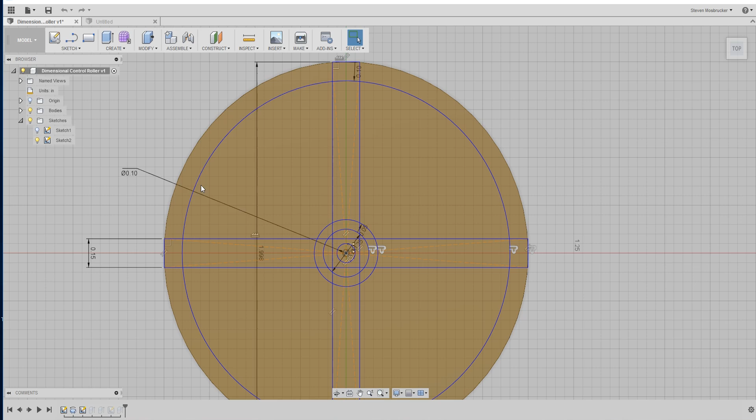So last time that we worked on this, we did the roller of the dimensional control, and this one might be a little different. Reason being is I accidentally, last time we did it, turned off my computer and I lost all the data, so I just redid this really quick.

So it could be a little different, but at the end we'll end up with the same thing after I print it and fix it up. One thing you might note is that I did extrude that cylinder all the way down, because on a 3D printer you don't want any overhangs. So here everything should be just fine.

Alright, so what we're going to do today is design the brackets that hold up this particular part here, and then at the top it's going to have little holes for the pressure sensors, for the FSRs, the force sensing resistors.

So what we're going to do is, what I know is that this hole that I have right here is for a shaft that's 0.1 inch, and also another thing on this is we're going to be doing it in inches, and then all you have to do at the end is turn it into millimeters, and everything's fine. Okay, so they are going to be square.

They're going to be square brackets. They're going to be 2 on each side, and remember that this is only one of the 2 spools. So there's going to be 2 spools that have to ride on this one bracket, and one spool has to be stationary and constrained so it just rotates and does not move in X, Y, and Z, and this one moves just in Z, I guess you could say, but also rotates.

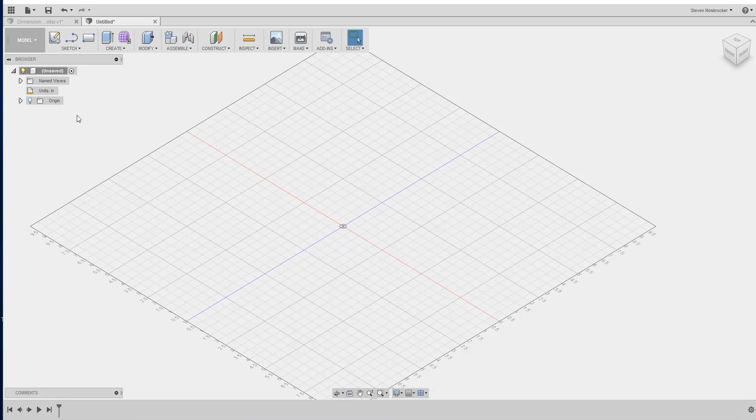So what we're going to do is, like I said, we're working in inches. I got another file open here, and we're just going to start doing a sketch on the flat plane here. And what we're going to do is have this, again, attach to a piece of square steel tube steel.

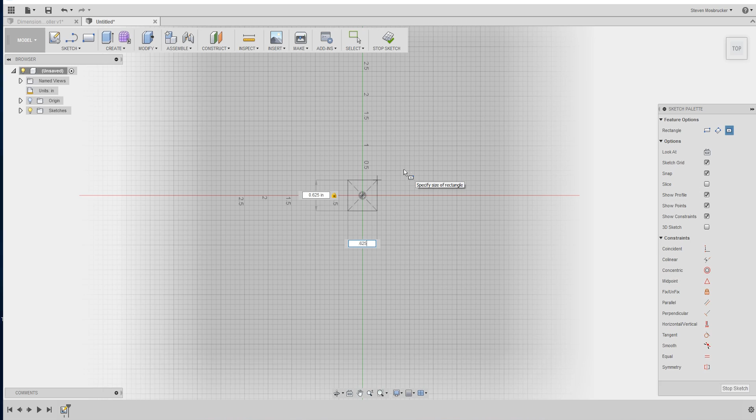And the square tube steel is 5/8 by 5/8. So that's 0.625 inch by 0.625 inch. Is it 5? Yeah, so 5/8 and 3/4 is what I got. Okay, so this is the steel piece, and then of course we're gonna add 0.63 or whatever.

It's gonna have a little bit over so that it slides on there correctly. And then we're also going to put a little hole in the back for a set screw, so that you could put a set screw in there to keep it from falling, because there's going to be a lot of weight on here, and it's going to be cantilevered out, so it shouldn't be that big of a deal.

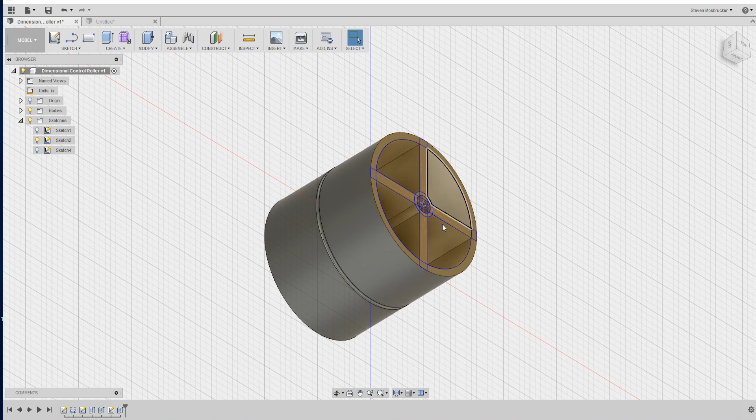Okay, so we have that guy, and then what we're going to do is we're going to have the brackets come out. And another thing is that this guy is going to be, depending... what did I do? I think this one I just made 2 inch. So we'll just have it be 2 inch for right now.

Like I said, we're just doing it roughly. 2 inch seems fine for me. So let's go ahead and do that. So what we're gonna do is we're just gonna draw first off. What I'm going to do is I'm just going to draw a 45-degree line. So 45 is equal, I'm just going to draw out to the side.

This is going to be the gap piece. This is just going to be 1 inch, so it's 2 inch diameter. So from the middle here, it's going to be 1 inch. Put that over there somewhere. And from here, it's going to be 1 inch.

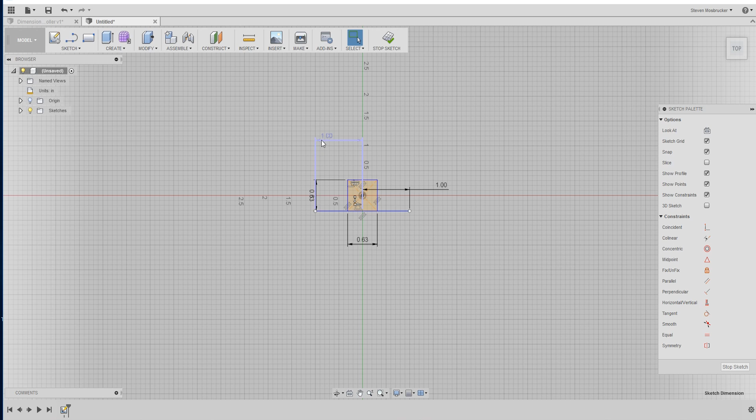And then, of course, you could constrain them to be equal. This one's equal to that one. It's overly constrained because it already says 1 inch. But you could delete that, make this one equal that one.

Alright, so 1 inch, 1 inch, and then what we're going to do is for right now just have a diagonal here. Go out to that line.

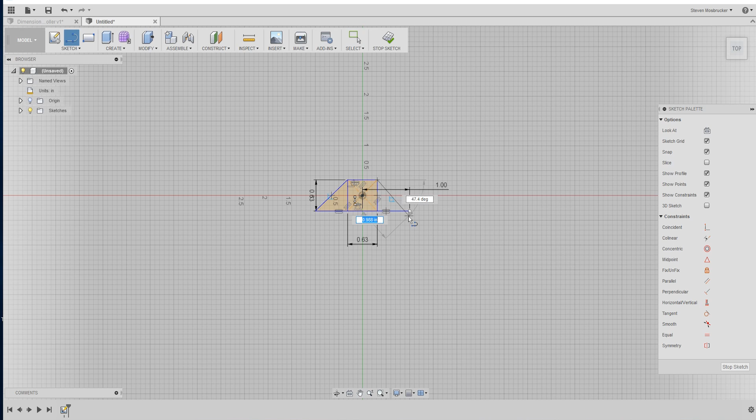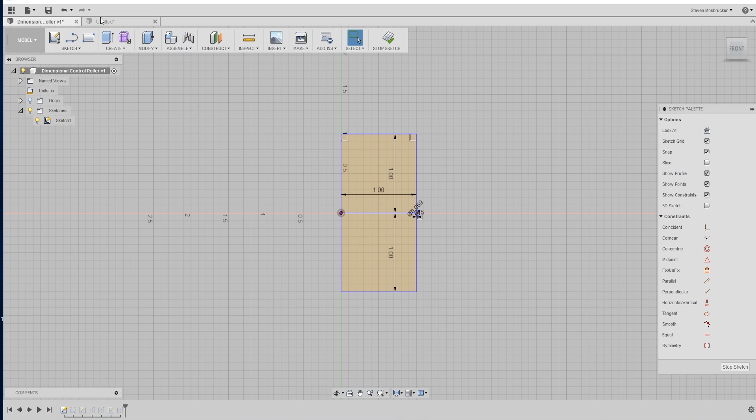And then that part right there is 2 inch, so this is going to be the sidewall here. So then we have it, each cylinder is... where did I have it set? I had it set to, let's go ahead and edit the sketch. So it's 2 inch diameter, which is what I want. So that means it's going to be 4 inches total plus the filament in between, plus 2 mil, which is pretty much nothing. So we're going to make it 4.1 inch. So down this way, 4.1 inch.

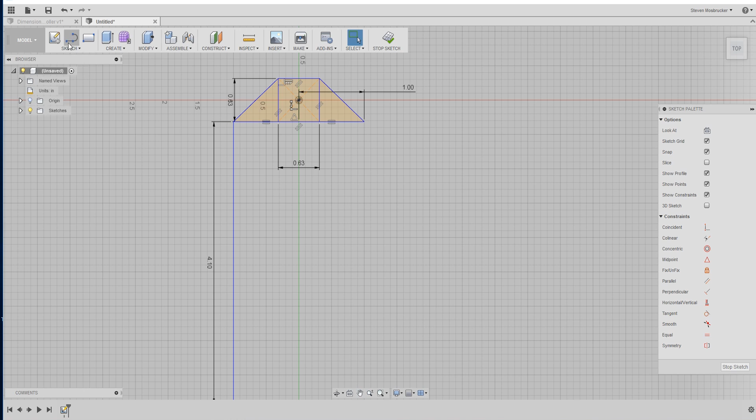Right. It's going to be 4.1 inch. And then what I'm going to do is just delete that and make these two equal. This one. Okay.

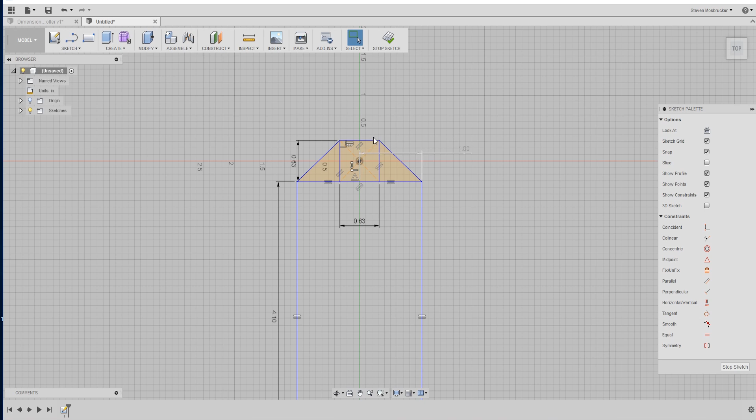So now what we're going to do is square this up for right now. Not going to go for anything super crazy as far as the design here. And then we'll probably put some gussets in here or something. Okay, so let's just go straight across here, and then this should be...

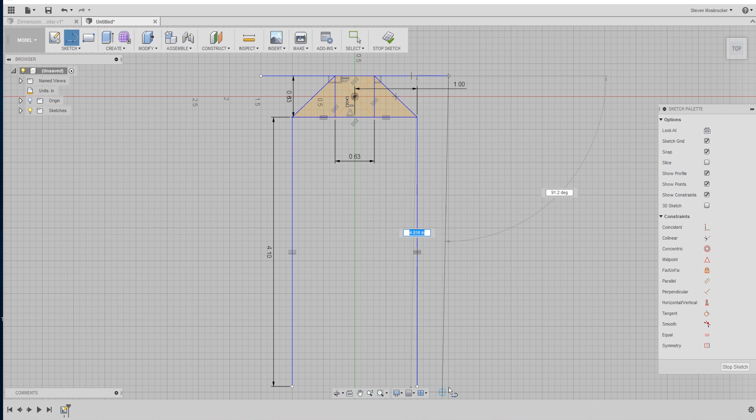I think, what increments are these? This is half an inch increment. Okay, oops. Sorry about that. Okay, so there you go, half an inch increment. There's another half an inch increment.

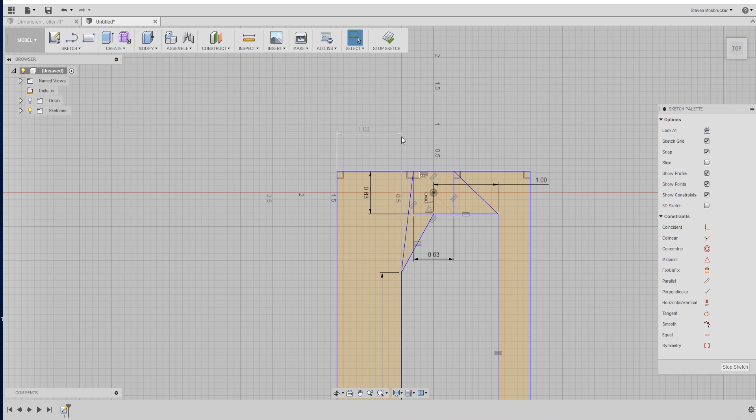You're probably gonna definitely need to be thicker than that in order to hold. It's not a lot of weight, but you don't want anybody to hit it and have it fall over or anything like that. So yeah, it's constrained over here. This piece is constrained, or something. These aren't even straight.

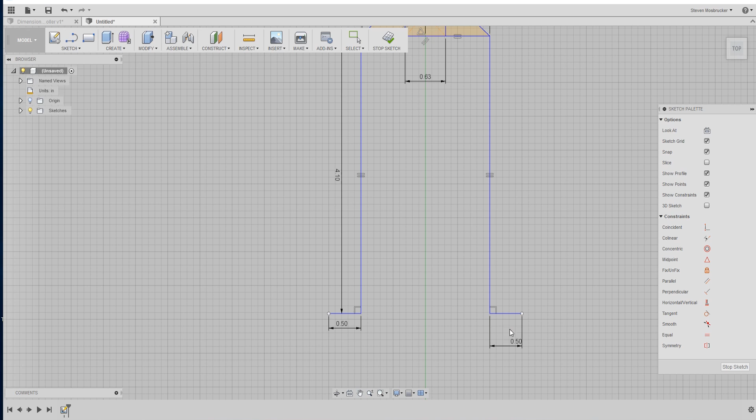Okay, so what we're going to do is just do a line. And we're going to dimension this here. And we're going to delete this one. This one's not even straight. Dimension this guy. And then these two are going to be equal. Okay.

Let's draw a line down. Okay. Alright, there you go. Now it works correctly.

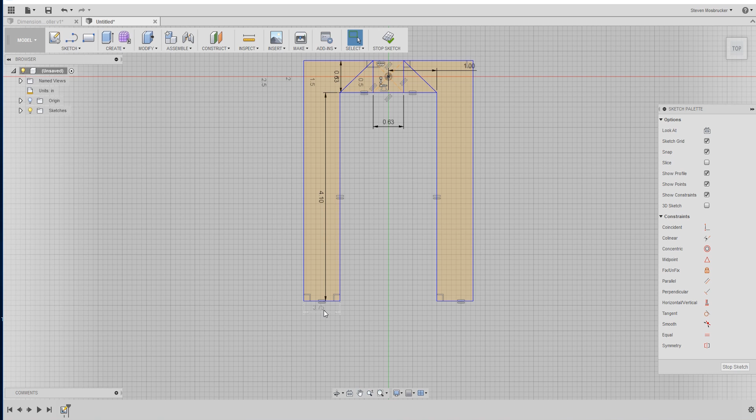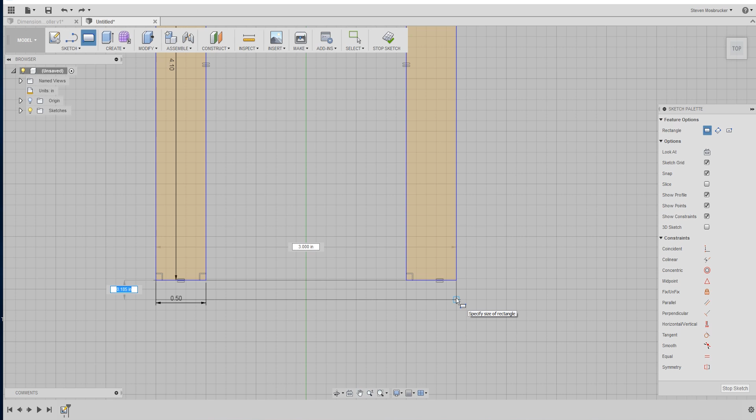Alright, so now that we have that done, what we're going to do is, another thing that we're going to do is I'm going to square this up. So I'm going to basically put a rectangle there. Let's do 2 point to cross it. So let's make this 1/4 inch. So there we go.

Now it's going to have some rigidity here because it's closed there. So these two are going to have some rigidity. Alright, then what we're going to do is extrude this. Extrude everything except for that centerpiece, and I'm gonna have to have something over here on the back, so there's gonna be a piece over here in the back. I'm sure we should probably do right now. And then over here in the front too.

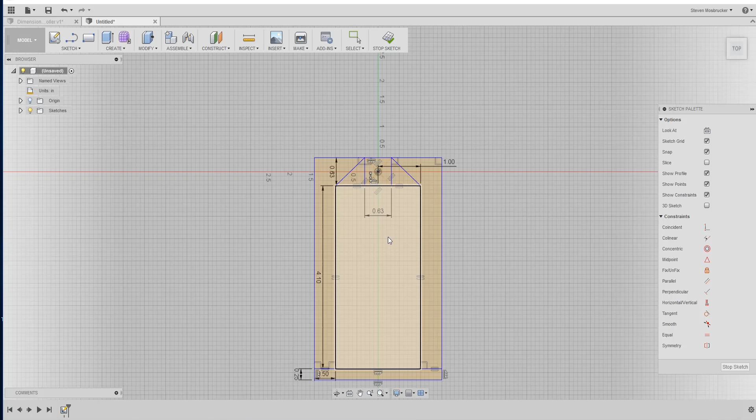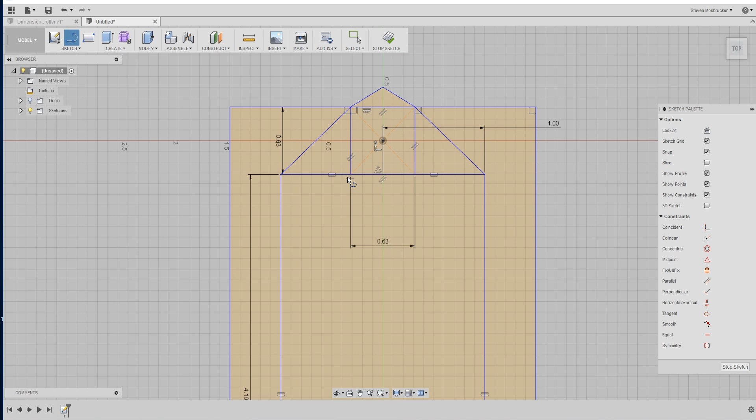Oh, no. Let's just do that for right now. It's definitely not enough to get it to become rigid, but for right now, that's what we're going to do. Okay.

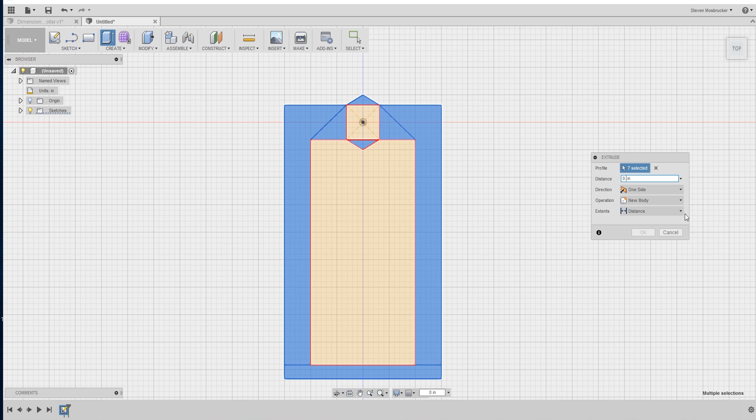Alright, and because, like I said, we're 3D printing this, we need to get it to a size that could be printed pretty efficiently. So 1/2 inch is pretty big. So we're gonna go for that because we need the rigidity. Alright, so there we go.

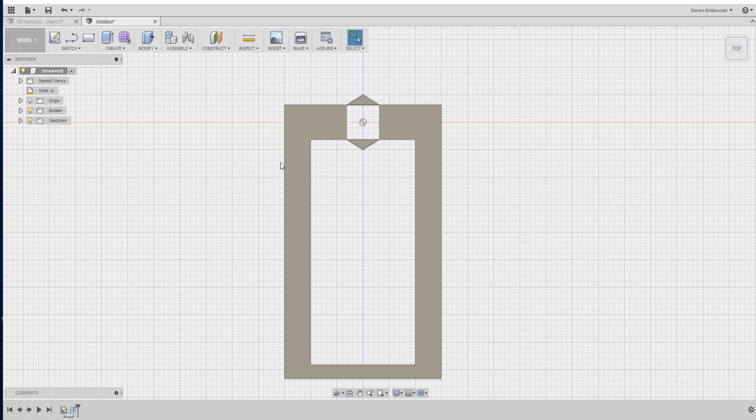There's our shape. Here's a little reinforcement. Obviously not gonna work, not gonna work very well. We're going to need to reinforce this area here, and most likely do a lot of reinforcement in the back and then a little bit in the front. Let's probably make another square. So let's do that right now. Then what we'll do is we'll just make that guy longer.

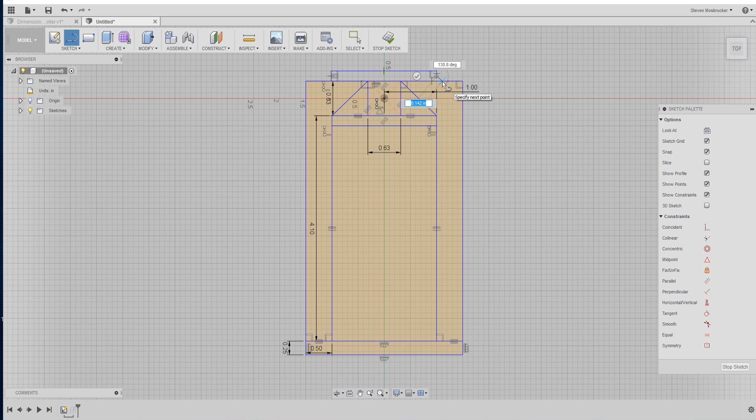Oops. Alright, so it just automatically added that. And another thing is I noticed that it extruded this piece. Don't want to extrude that piece.

Okay, so now we have that, and now what we're going to do is start drilling holes on the side where each one's going to go. And so now if you think about it, this is vertical, this center piece is like, this is the XY plane, and the Z plane's up and down. And the pipe goes through the center, so this is cantilevering out forward. So the filament is going to go down through this section here somewhere.

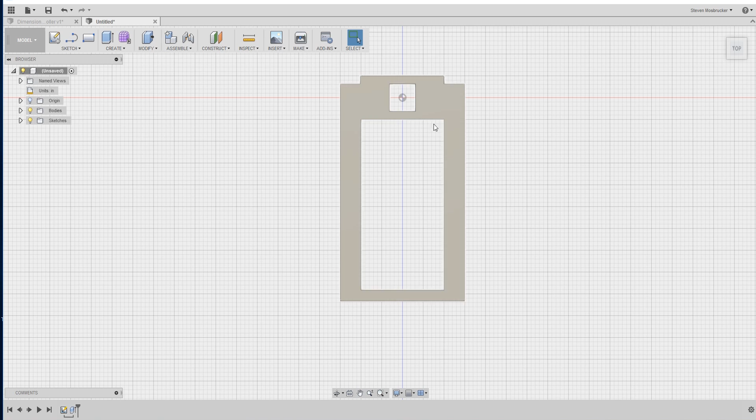So this piece here, one roller is going to be mounted here in this place, and it's just going to spin. The other roller is going to move up and down, so this will be slotted here.

So what we're going to do is go on the right side. We're going to create a sketch on the face, and then we want to project or include this particular line here, this particular corner.

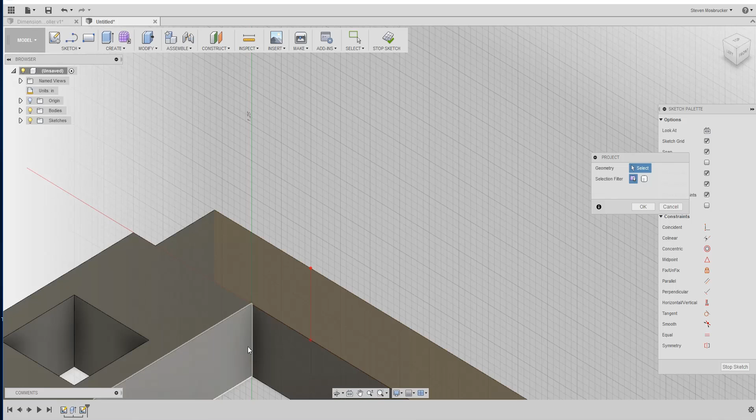Alright, so now we've projected that corner. Now obviously we're going to use the center line here, and we're going to go over 2 inches, to 2 1/8 or so. Give it a 1/8.

Okay, so now that is our point, and then that's just going to be drilled through. And what we're going to use is that size. I mean, you could do a hole. For this case, I'm just going to do a circle because I could do it all in one sketch. I don't have to, sometimes holes are good. I usually just use holes for tapping reasons and stuff like that. But you could do circles and just extrude it through, so you could extrude everything at once instead of having a whole bunch of holes with different sizes and stuff.

So this is going to be 0.10, and that's going to be the size of the hole. And then that's going to be extruded all the way through.

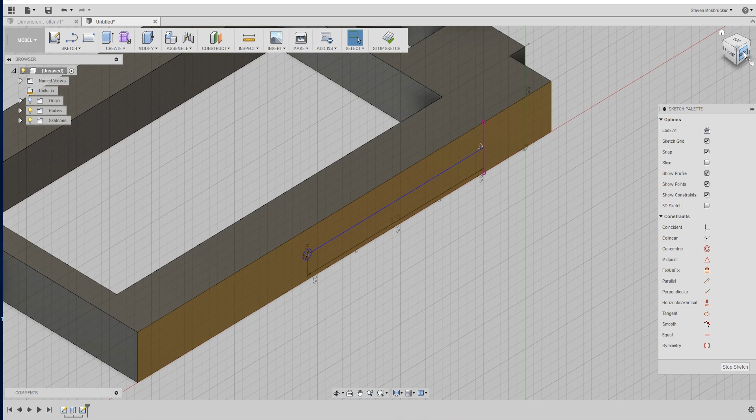And then what you have, I made this 2 inches. This is actually supposed to be only 1 1/4, 1 1/8. And then you get issues there.

Project include, I mean this is already projected and included. So what we're going to do is make these two parallel, this one parallel to that one. Okay, so now that's constrained. And then another constraint is probably going to say this is over constraining, but whatever. Yep, okay, so it's 1.125.

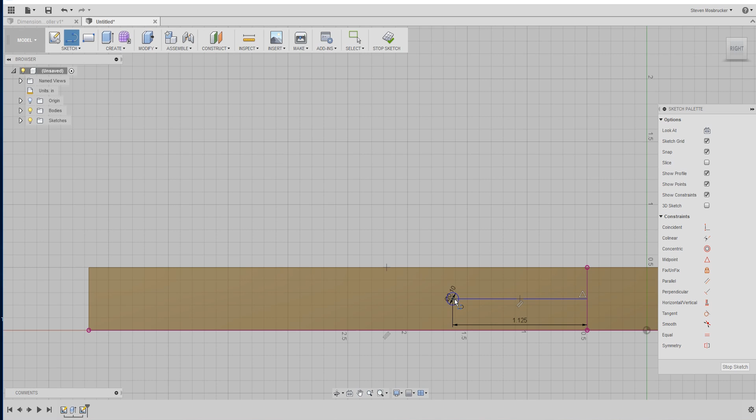And our next thing we're going to do is another line, give it 1 1/4, 1 1/8, sorry, another 1 1/8, and then that's going to be the next pin. No, sorry, that's the end of that pin. 1 1/4 is the end of that pin, so we're going to go over another 1 1/4, 1.125. So there's our next pin there.

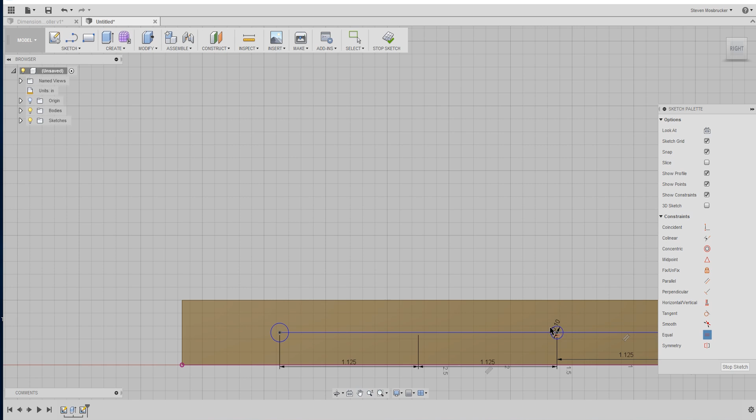This is just going to be, whatever, delete that, and then make these two equal. There we go. Okay, so there's our second pin.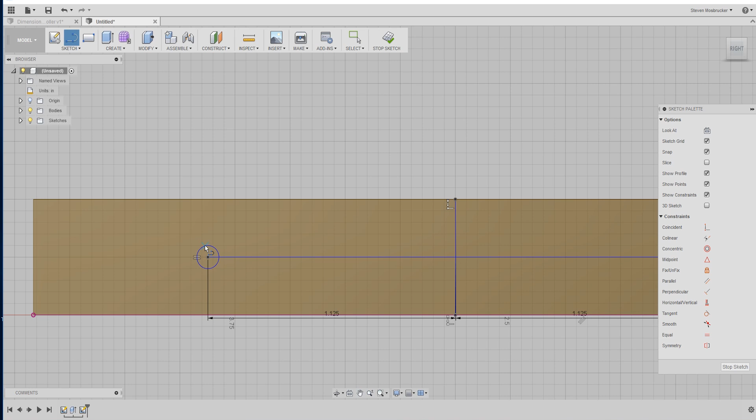Now, the thing about this pin is that it's going to be moving back and forth. And so what we need to do is have it have an area to move. So we need to cut from this point where this other pin is. We're just going to cut all the way across.

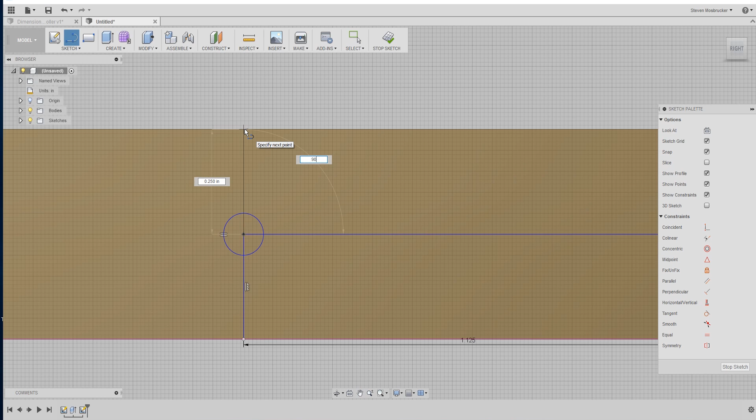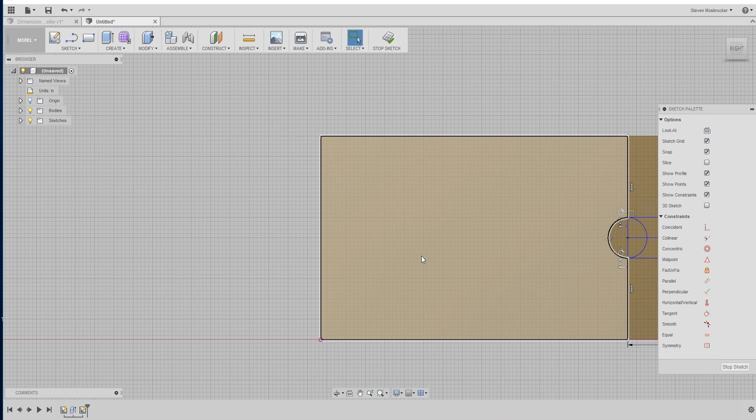So what I'm going to do, for whatever reason this is defaulting. I'm going to put a point, 2 points. This one I don't think I clicked on the line, I don't think it coincided with that corner. I don't know why this thing is doing that. 180.

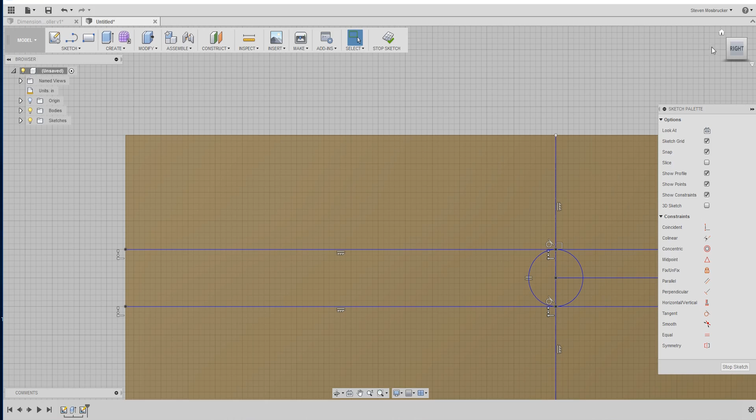Thank you. Okay, and then the next thing that we're going to want to do is we're going to project this corner again so we don't cut through the corner, so we don't cut through the support here. So we're going to project, include that corner.

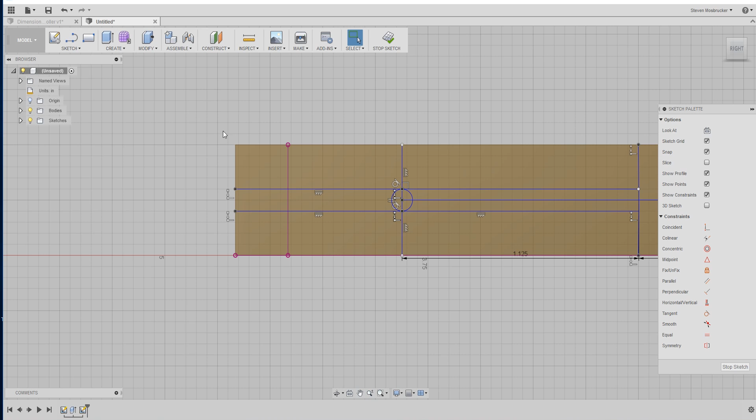Alright, so we're just going to have it do that pretty much. Okay, obviously the next thing that we need to do is escape that. We're going to go back to this first sketch and then change this to plus that other one. So let's just make this like 4.5 inches.

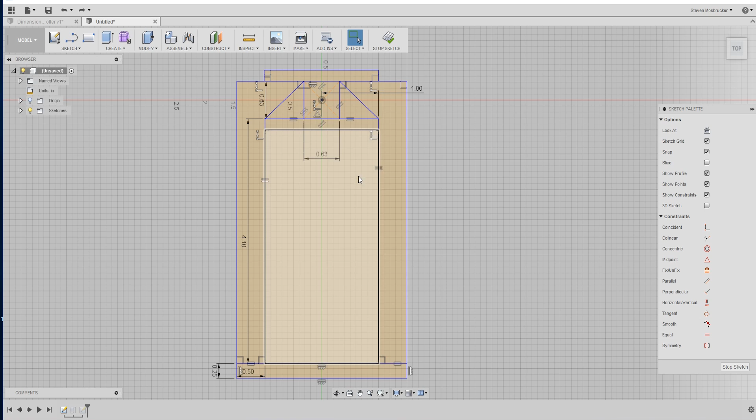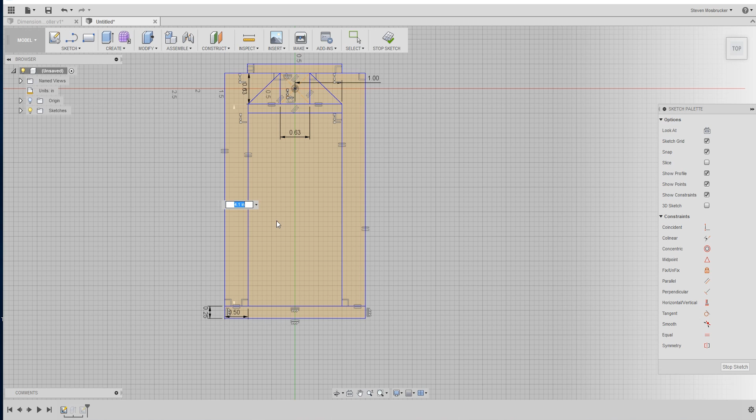Uh-oh, some stuff's not constrained. Crap. It's not constrained, this is not equal to that, this one's not equal to that. Okay. 4.5, there we go.

Okay, so now we're going to go back to the other sketch. Alright, now this is good, this is constrained, this is going to be slotted. Don't really need that, that's just the rest of the line. Make sure it's straight. Actually, what I could do is put that line back, make that a construction line. There we go. Just make that construction line.

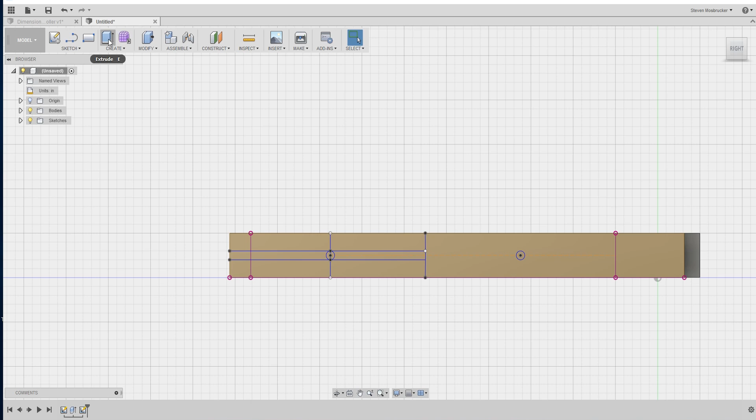Alright, so now what we're going to do is go ahead and extrude these. So I'm going to extrude. Oh, this is not closed.

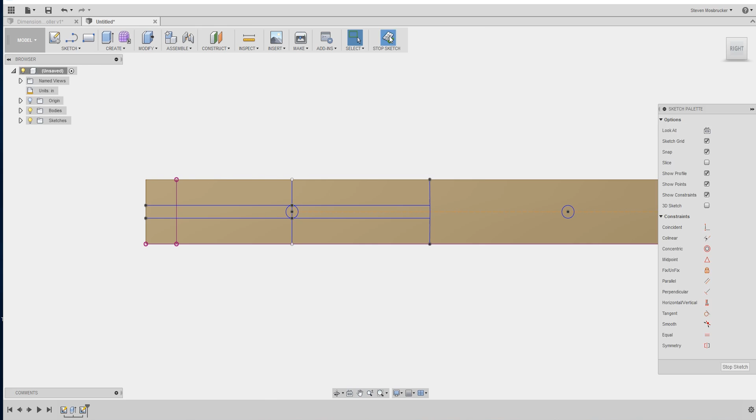There we go. Okay, let's do that, and that. We're going to go from one side to the next side. So now we have the channels that the rollers are going to travel in. We have a reinforced shape here, plus the space here. Should be all set up correctly. Shoot it on one side. We did it all with four sketches.

So now the other thing is how to make this slide efficiently so it doesn't squeak and stuff like that. And also we need the springs.

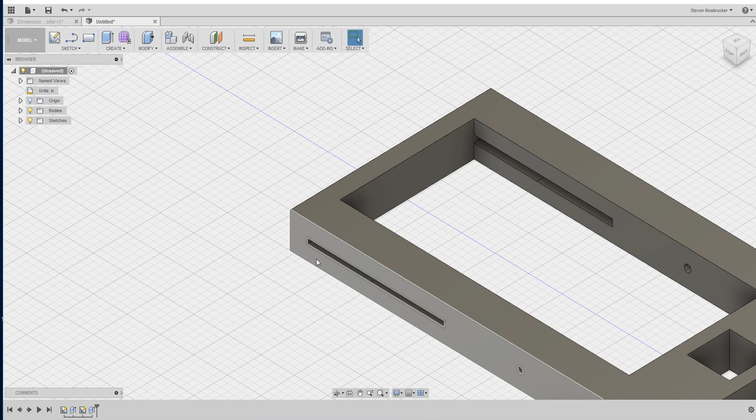Actually how I'm going to do the springs is on the outside here. So there's going to be little squares on the back side of those pins, and then they ride up and down this channel, and then they go here.

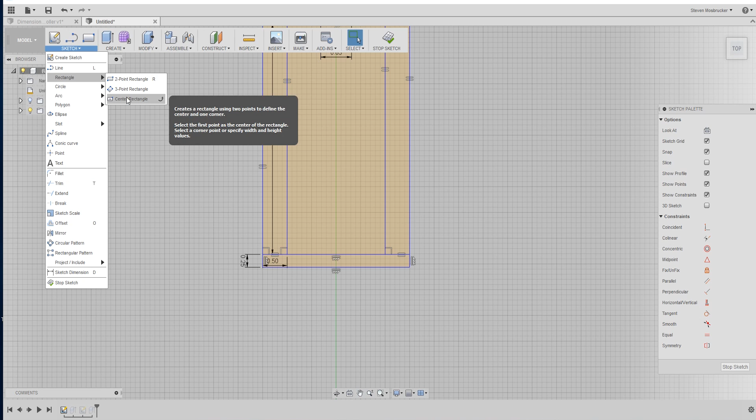So what I'm going to do is a little perch back off on this guy. Let's do a little perch. What I mean by a perch, you'll see in a second. So what I'm going to do again is I'll do it in the center of this guy.

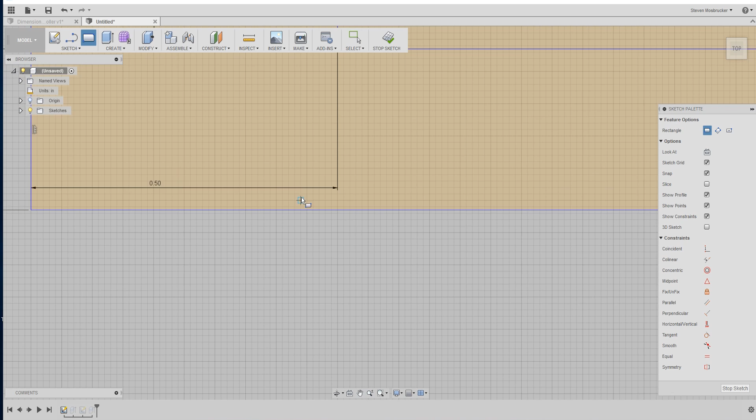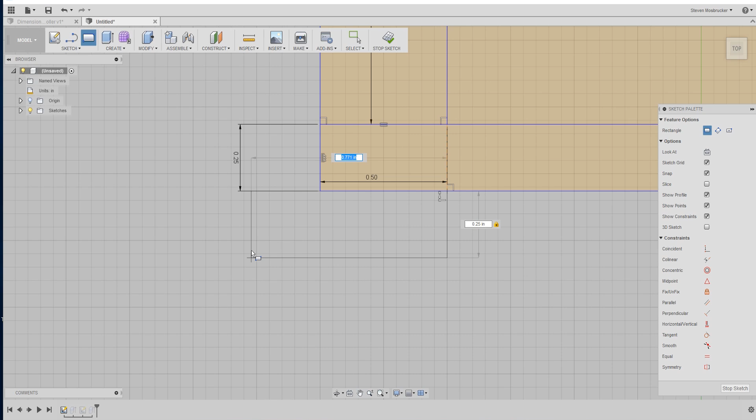That's not what I wanted. Let's do another rectangle, from here. Oops. I don't know why it keeps doing that. Okay, rectangle from this point, about a 1/4 inch, and then we're gonna do it to about this point or so.

That seems fine. And then what I'm going to do is just have it constrain the point from here to here, which is 1/4 inch. And then I'm going to do the same over here.

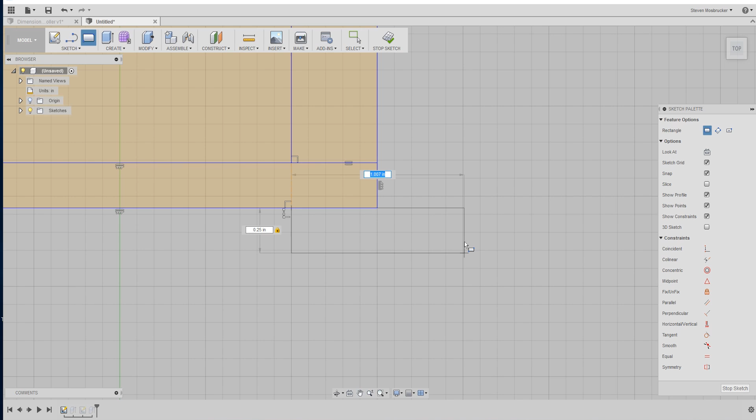This is going to be 0.25. This is going to be out to wherever this is here. And then this, I'm also going to sketch dimension here to here, 0.25, 0.25. And then what I'm going to do is just make these two lines equal. Make both these equal. This is equal to that. This is equal to that. This is over constrained, that's fine because it's rectangular or whatever.

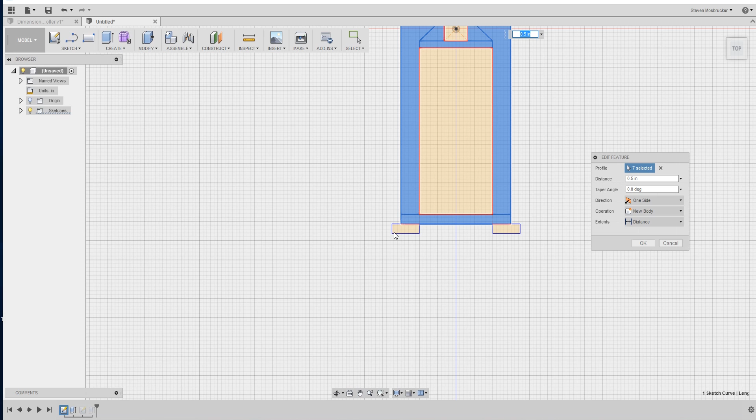This one. Okay, so we got our little perches. Now that I'm looking at it, they're definitely going to need to be longer. So what I'm going to do is return this to 0.5. And there you go. Okay, so there's our little spring perches.

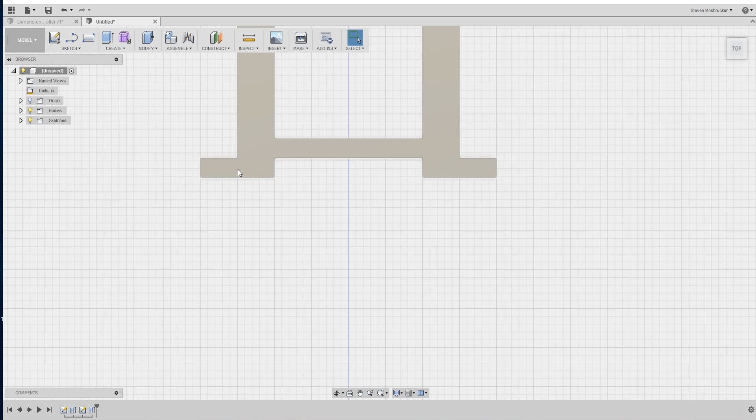So these are our spring slash FSR perches. And now what I'm going to do is do a sketch on both of these to get them to be correct. I don't know if in actuality I'm going to do 2 FSRs or 1 FSR. I'll probably do just one.

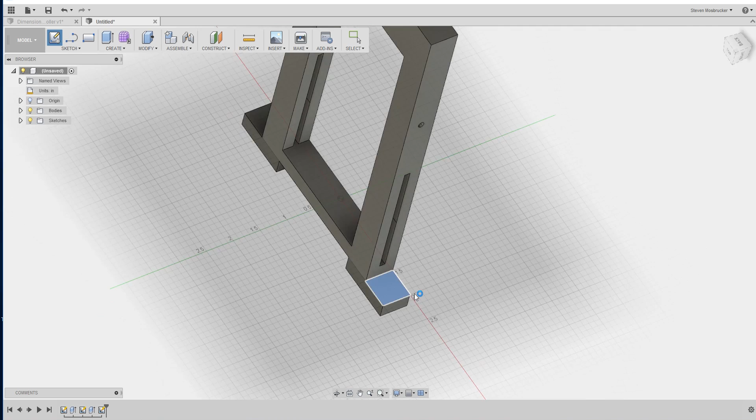But let's go ahead and go back to the right side so we don't get confused about which side we're doing stuff on. Alright, so let's go ahead and start drawing our perch. First thing, I'm going to find the center line. Then draw 2 construction lines. Put a point in the center. There's our point.

And then let's just say that we have a specific one. So this is going to be the FSR perch. This is going to be the FSR side. And I actually have one over here somewhere. I think it should be. Pretty sure I have one over here somewhere. Ah, here it is. Okay, so here's my little FSR.

Really cheap, nice sensors. Like I said, not very good for absolute, but pretty good for reference, between after you calibrate the sensor to be the same. So I'm just going ahead, it's pretty much 3/4 diameter for the most part. And of course these will be glued down to some point. There's my cat again.

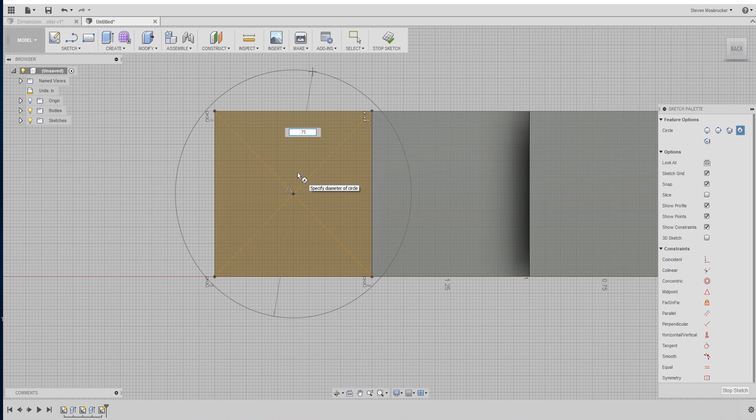So let's make this 0.75. Wait, what? Interesting. So yeah, 0.75, that's okay.

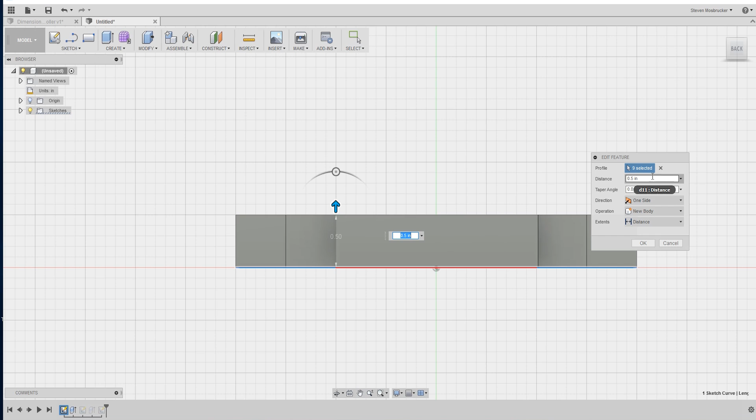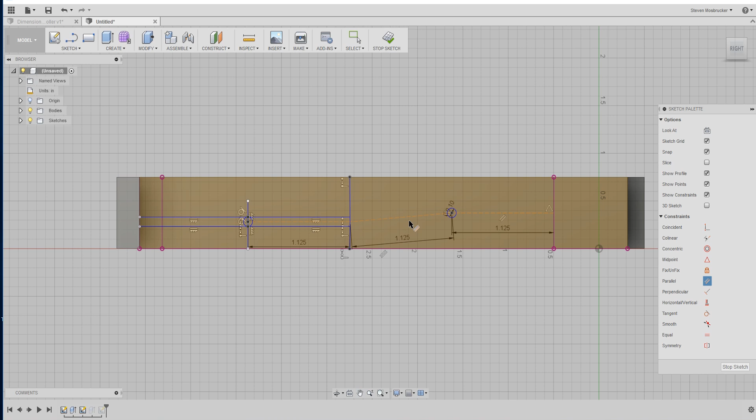So if that's the case, then what I'll do, let's take a look real quick. And it said that was constrained. There we go, that's what happens when stuff's not constrained.

Okay, now what I'm going to do is go to my next one. What was it, first one? First one, first one, okay. I'm going to put this. And then actually what I just did is not going to work. You'll see why in a second.

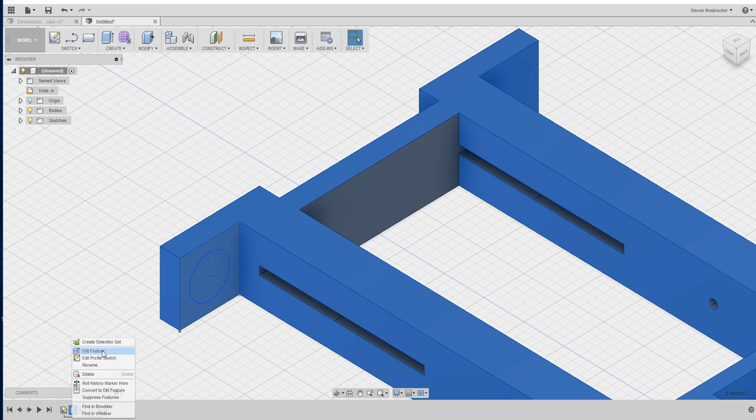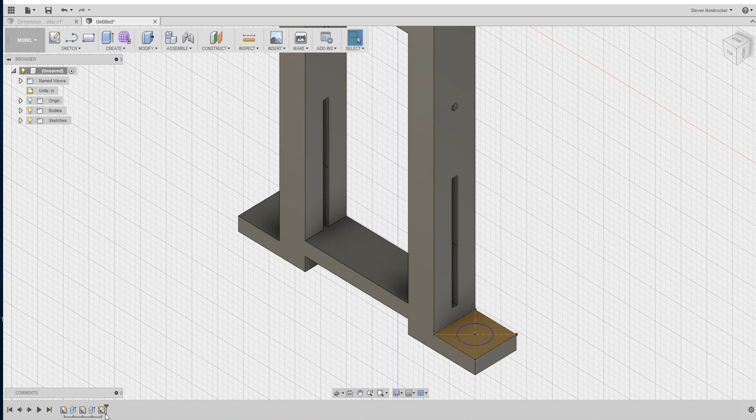Because this guy is going to have to be, oops, this guy is going to have to be like 0.8 inch. Okay, and I got a 0.8 inch. I need this other one, 0.8 inch. Okay, so now what that means is that this piece here can be 0.8 inch, and then the interior be 0.75.

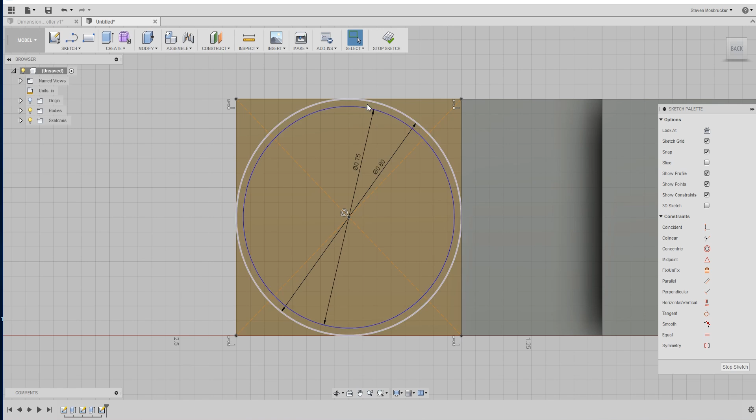And there is our little lip to hold it in there. And then what we need is a cut inside for the little wire to come out. And if we are making this the top, we want the wire to come out through the top.

So here's the top. Okay, just make sure to calibrate here. I'm measuring the little wire that comes out.

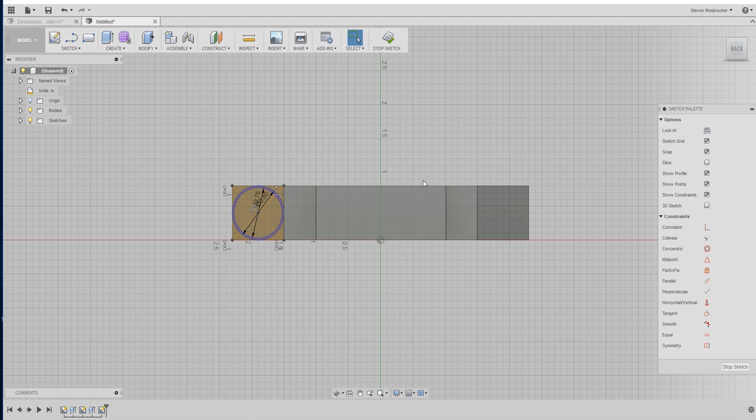Thickness is 0.30, so let's do 0.35. Okay, rectangle, center point rectangle. Off over here to the distance somewhere, 0.35. That's fine. This doesn't need to be constrained, it could be whatever as long as it goes off.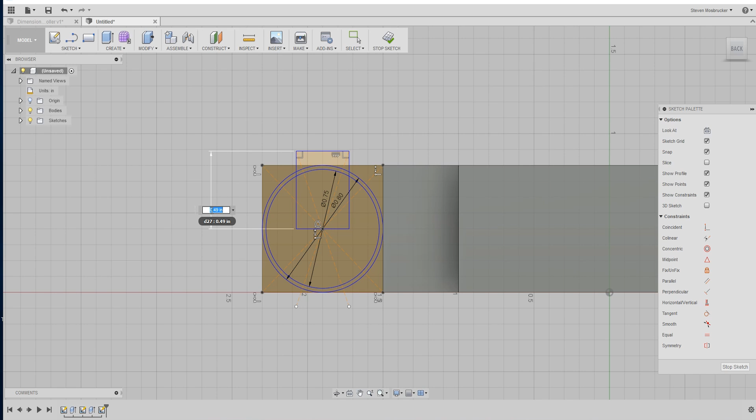Nah, that's fine, whatever. Oh, this is not supposed to be 0.35, I meant to do this one. 0.35. Okay, so what I'm basically going to tell it to do is not extrude that part, pretty much. Alright, so now after that's done...

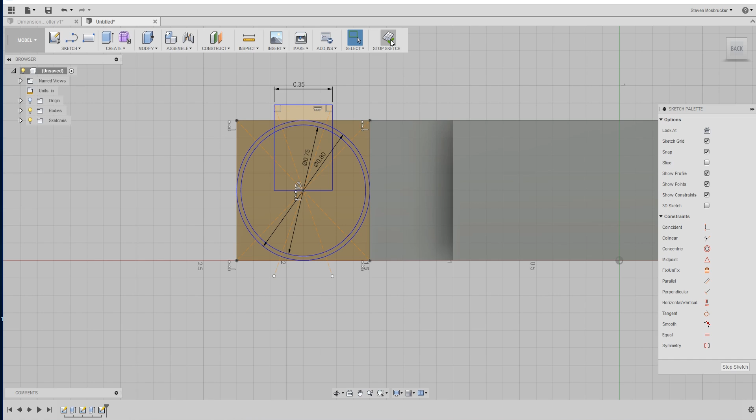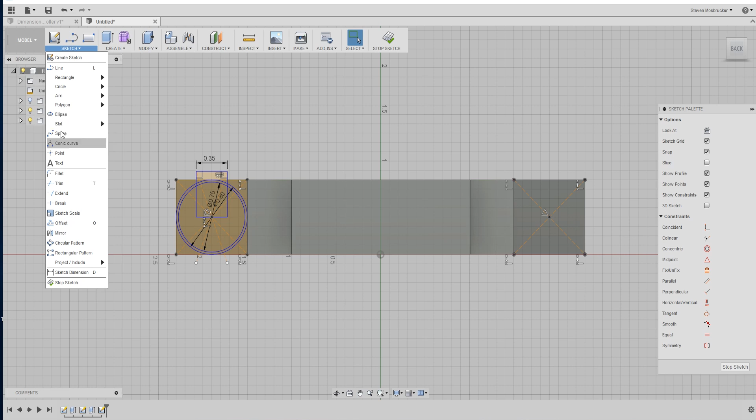What I'm going to do actually is make them on both sides. And then put a point. I'm going to put a circle, circle, circle, circle, 0.75, 0.75. And then for right now, like I said, I think I'm only going to have one sensor, for cost savings.

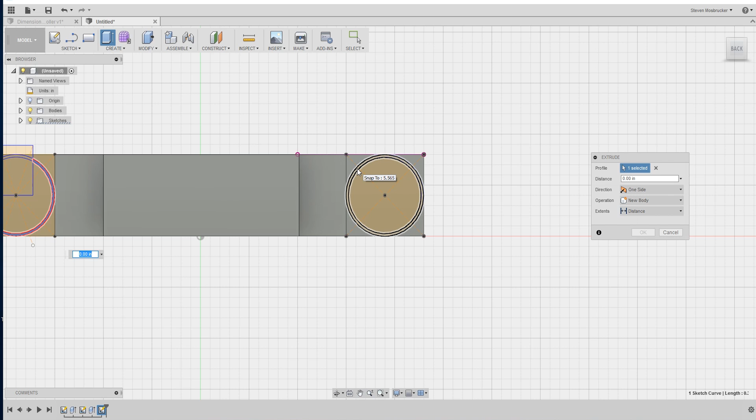So what I'm going to do is extrude. I extrude that, as you see, I'm extruding everything except for that piece. And then I need to make sure it's extruding the right way. This is going to be out. That's fine. Okay.

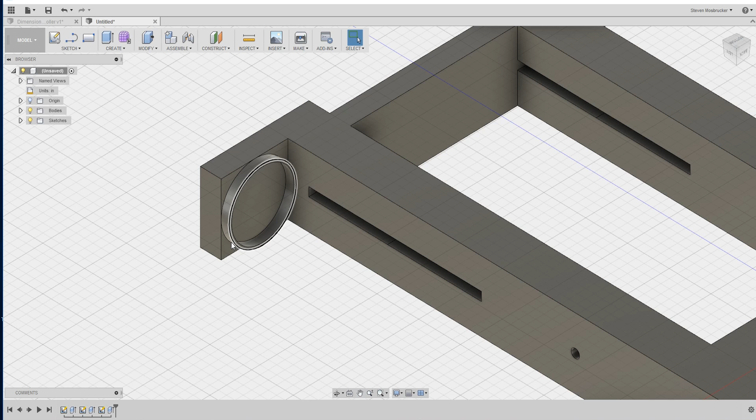So there are the spring perches. And then probably what I'll do is have a little cap piece that basically caps this. What happened? I think I'm on the wrong side. Ah, there we are.

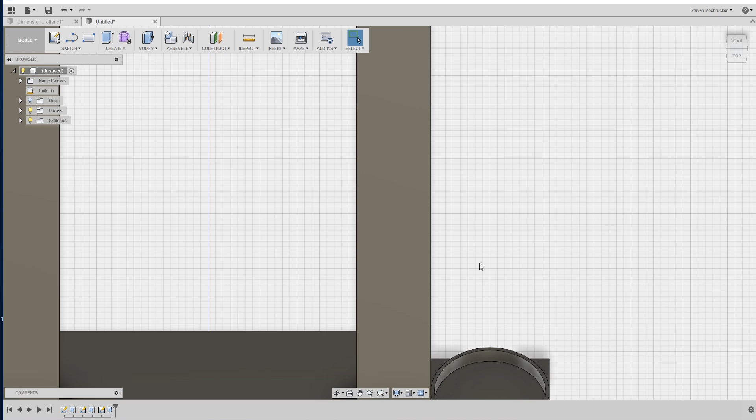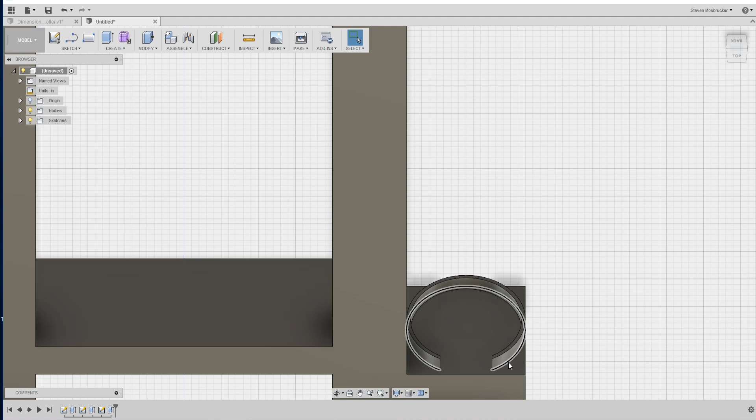So there you see the little hole that this band comes out. So what I'm going to do is have a 3D printed cap so it distributes all the force. Basically it's a piece that goes on top of the FSR, the little circle resistor, and there's a little cap that goes on top. Then a similar principle on top of that cap, so it doesn't cause the spring - because the spring could not be 3/4 inch - to move around or anything like that, and also to distribute the entire force rather than just on the center.

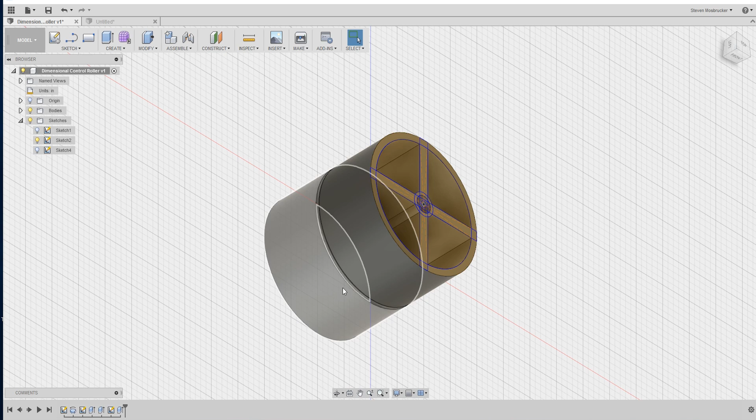All right, so that is pretty much all I could think about as far as this particular piece is concerned. So again, what we created here is the bracket that this roller will ride in - two rollers will ride in. One would be constrained over here to just spin. The other one, let me see, this one, the other one will be constrained to move forward and backward.

How I'm going to make this smooth, probably just smack some grease in there or something, just make it smooth like that, to move up and down, because you need it to move smoothly up and down in order to have a good reading on the filament diameter.

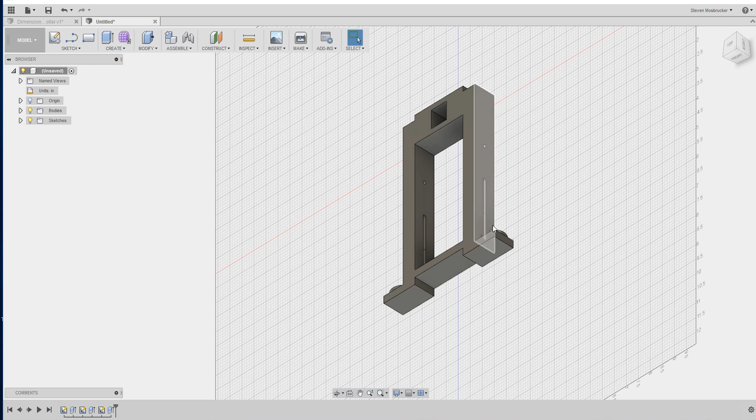Alright, so that is pretty much it. We got the 5/8 hole here for the 5/8 tube. We got some supports. We got the spring/sensor perches up here that will ride on this guy and push this guy into this other piece here. So we are ready to go.

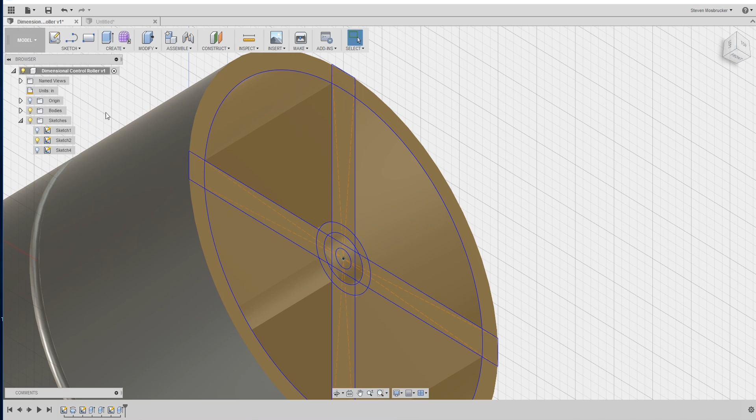We're gonna have to later on do the pins that hold the dimensional control together, and then at that point we are pretty much done. I mean, we could take a look at printing some bearings for the rollers so that they roll. If you remember, we have these little holsters here for the bearings, so they spin freely. So we might also catch that, take a look at that.